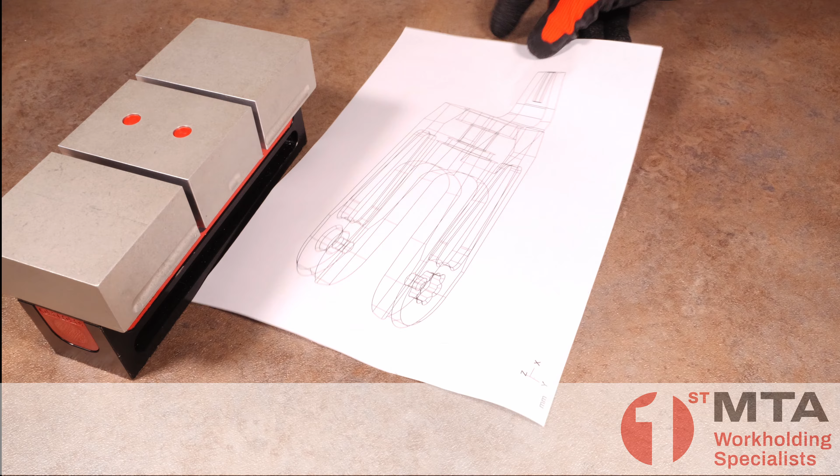This is a Qwik-LOK with machinable jaws. This is a complex workpiece, and this is a stack of aluminium raw material.

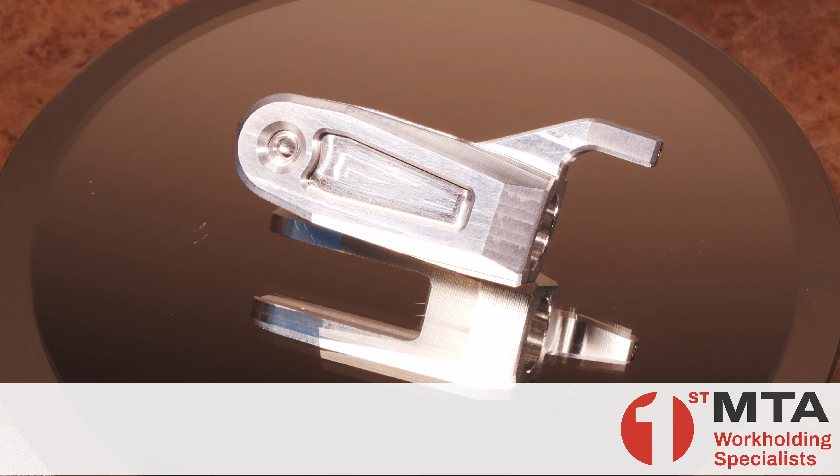In this video, we are going to prepare our Qwik-LOK to machine this workpiece, which is quite a complex shape. This workpiece needs a minimum of 4 machining operations, and we are going to prepare the Qwik-LOK to do all 4 operations in a single cycle.

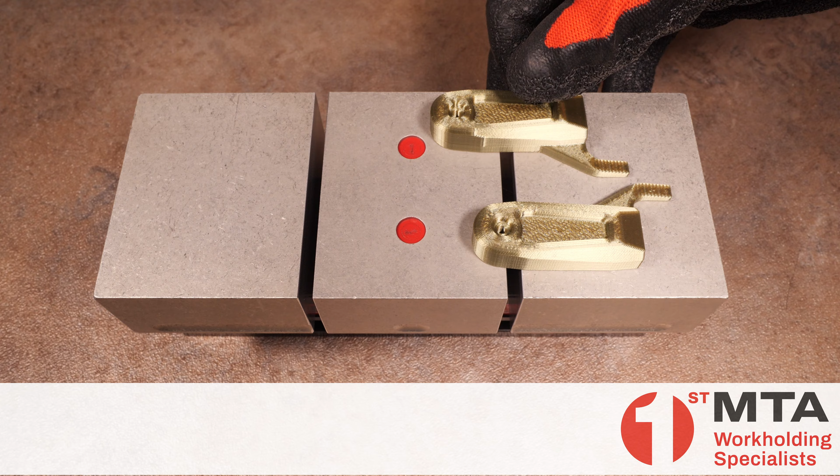In order to help us visualize these 4 operations, we have printed each of them out so that we can arrange them on the Qwik-LOK jaws and work out how best to machine them.

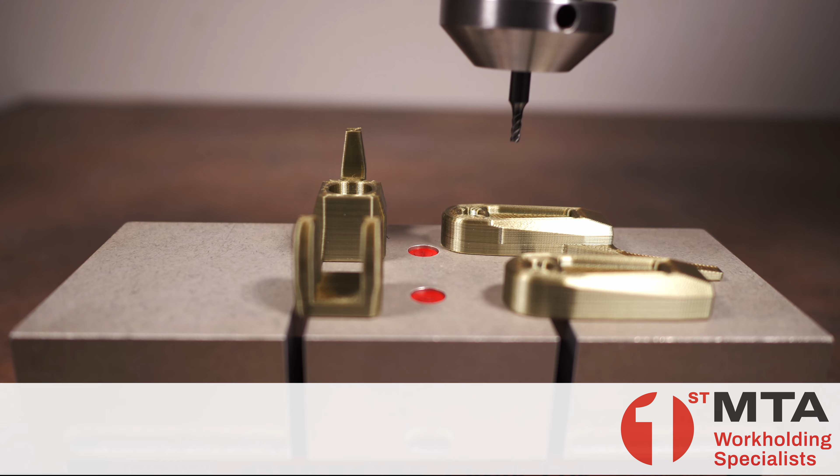This approach allows us to move these workpieces around to get the best fit and gives us some opportunity to check for tool clearance before we finalize the design of the jaws. Now let's move over to the CAD and design these jaws.

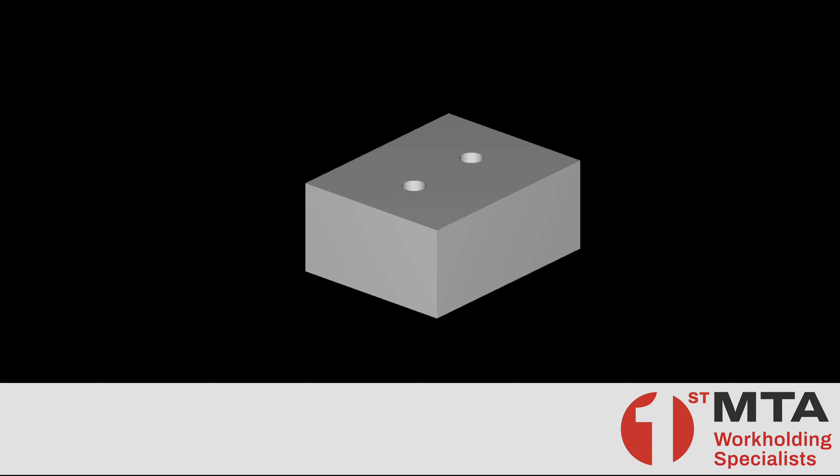Here we have created a basic 3D model of the jaws, but initially we are going to focus on the fixed jaw in the center, as this is where we need to get our part location in the X and Y axis. We will simply overlay a model of our components, which will give us a good guide on where to remove stock and create location.

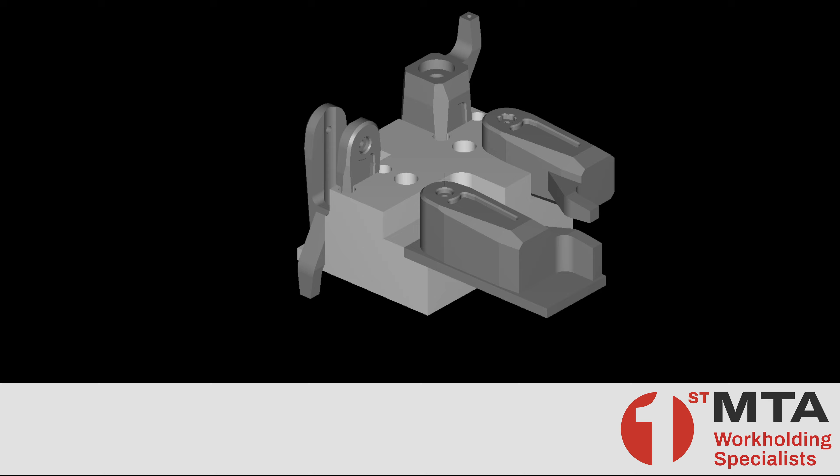Once this is complete, we can add our movable jaws and modify the model as necessary. Bearing in mind, all of our X and Y location must come off the center jaw, but the moving jaws can supply a platform in the Z-axis.

And now that we have completed our jaw design, we can take these to the miller and prepare these jaws.

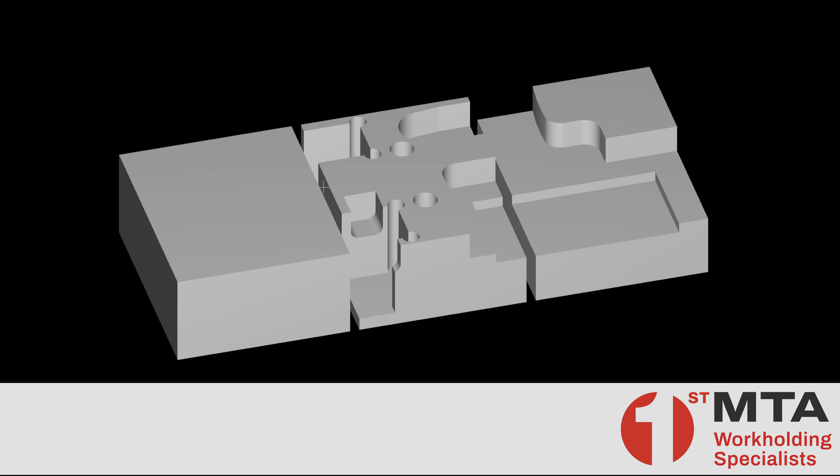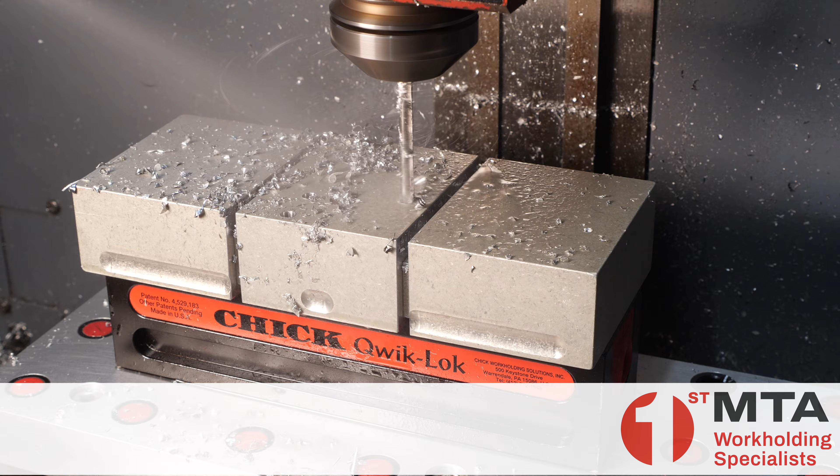With the Qwik-LOK in the milling machine, we first install 2 offcuts of aluminium to use as spacers. These will ensure that the jaws are correctly and evenly loaded while we are machining, but also that once machining is completed, we have some pinch on our workpieces.

Then we can go ahead and do the main stock removal process to create pockets to locate our workpieces, followed by a couple of finishing cuts, as well as a couple of other minor areas where we need to machine some tool clearance.

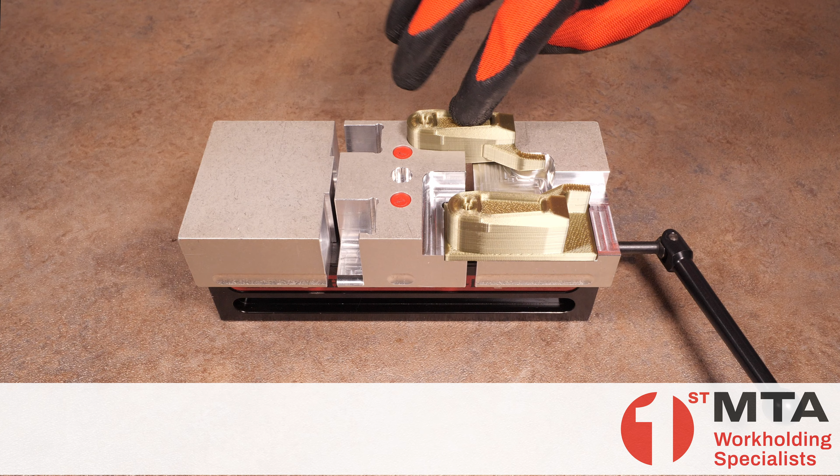Now that the jaws are complete, we can test them with some 3D printed parts to ensure that everything fits correctly and our tool clearances look good. And at this point, we can verify the machining process.

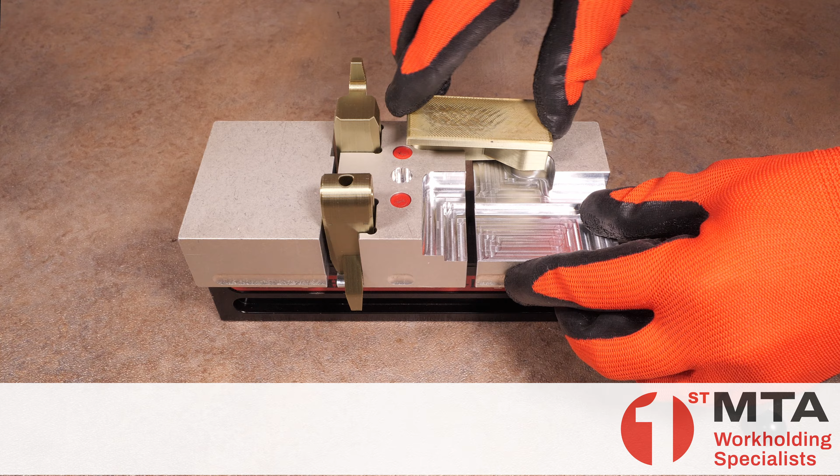After each cycle, we'll get 1 finished workpiece and add 1 piece of raw material. So let's go back to the milling machine and make our first parts.

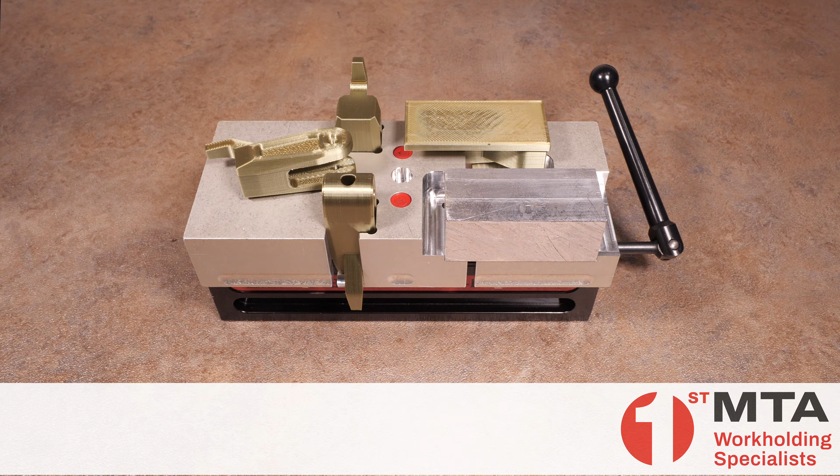For our first production run, we are only going to machine the first operation, so we will need some kind of spacer in place of the second operation.

At this stage, we have separate programs for each operation as we are still proving out and preparing our work holding.

With the first operation complete, we can move our workpiece into the second operation location, put a fresh piece of material in the first operation location, and remove the spacer.

With the second operation complete, we can now shift all our workpieces over, add a new piece of raw material, and add a spacer to the 4th operation location.

In this example, we are using a simple turned piece of aluminium. This is very important to keep the clamping forces even.

And with our third operation complete, we can populate all 4 stations of our Qwik-LOK, prove out the last of our programs, and get finished parts out after every cycle.

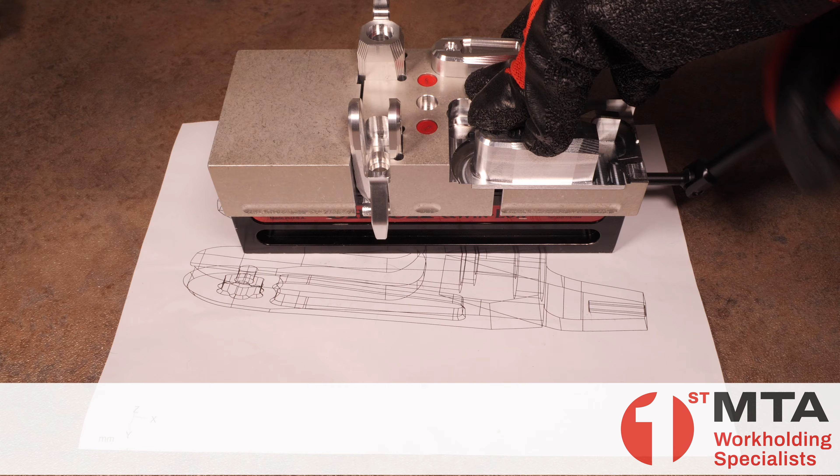As can be seen, the process is quick and simple, and the Qwik-LOK is ready to go for the next job in only a few minutes.

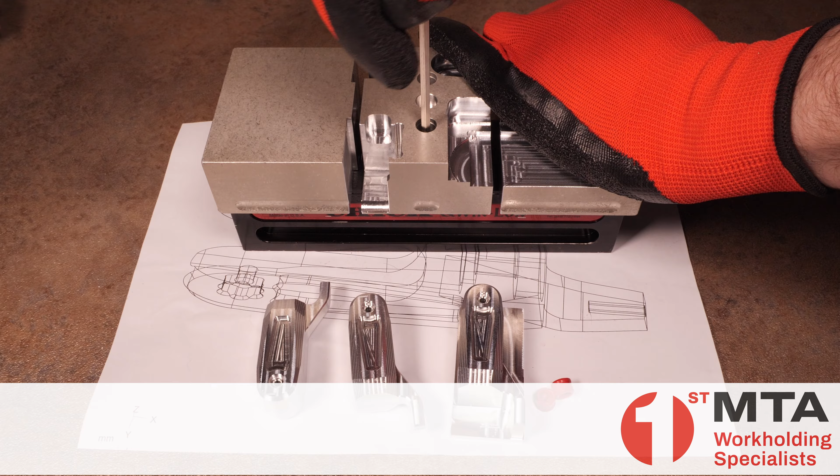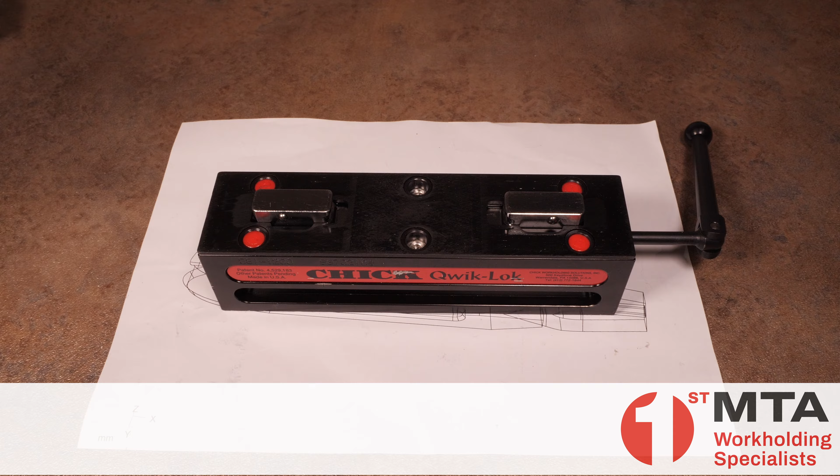We are going to keep our finished components alongside the jaws so that next time we do this job, we can get finished parts out from the first cycle and we don't have to go through the whole process of proving out again.

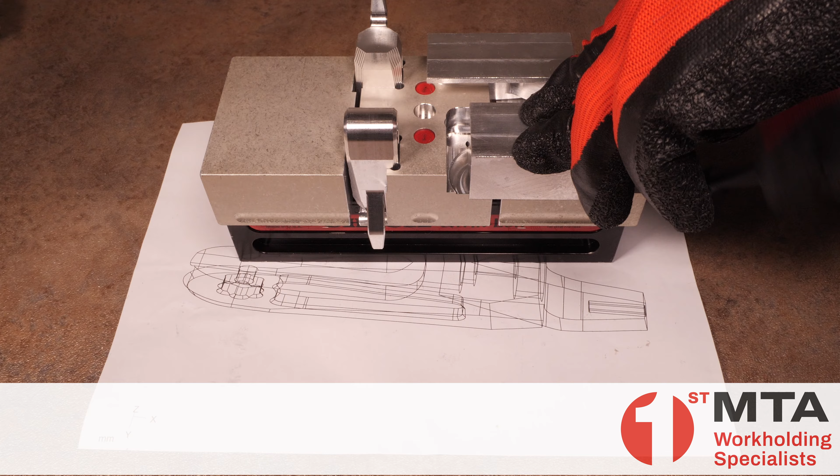Bearing in mind, if your tools are preset and your datum is where you left it on your machine table, then this is the entire setup process next time we do this job, which I'm sure we'll all agree is very efficient indeed.